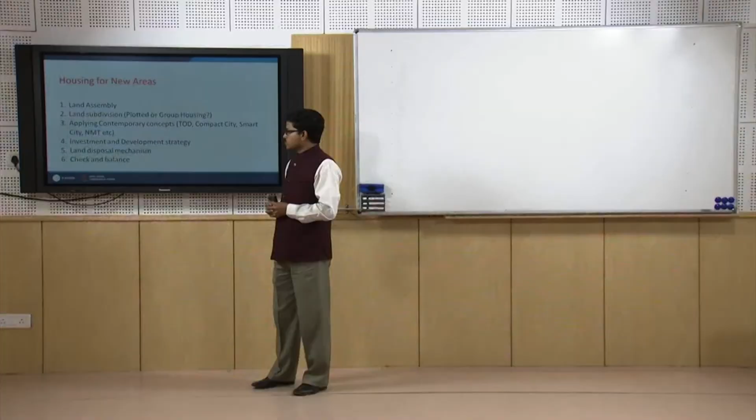Next, we discussed the investment and development strategy. This could be public, by a government organization, a joint venture using both public and private investment, or it could be entirely private.

Land disposal mechanism: if the land is acquired by the government, that is public land, developed for a township or public purpose, and should be distributed or allocated through a common lottery system. Otherwise, if acquired by a private party or investor, a separate mechanism can be thought out, with checks and balances by the public authority.

We discussed a few principles of land subdivision, like levels of planning. Planning is done at several levels: cluster level, neighborhood level, sector level, and also city level. Based on population, we started at the cluster level, which is nothing but a cluster of few families or buildings sharing common facilities like a small open space. Similarly, at the neighborhood, sector, or city and sub-city level, various kinds of facilities define its hierarchy.

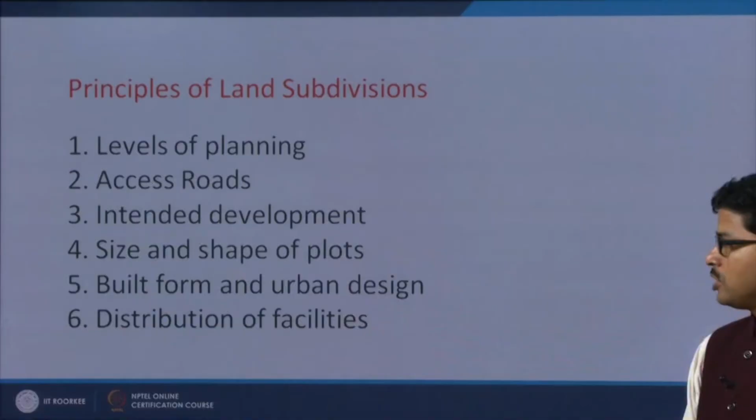Fourth, we discussed the size and shape of the plot. The size and shape should be such that wastage of land is absolutely minimum, because land is a very scarce commodity. The size and shape of the plot should be optimum and determined by calculating the population to be accommodated within the plot.

Then built form and urban design. Urban design involves more than one building, more than one block, more than one building complex across different plots. That's urban design as a whole - how we bring harmony, concept, and visual continuum in a series of plots or building blocks.

Apart from that, there are features like built form which can also be integrated into the overall development of the building. Then distribution of facilities.

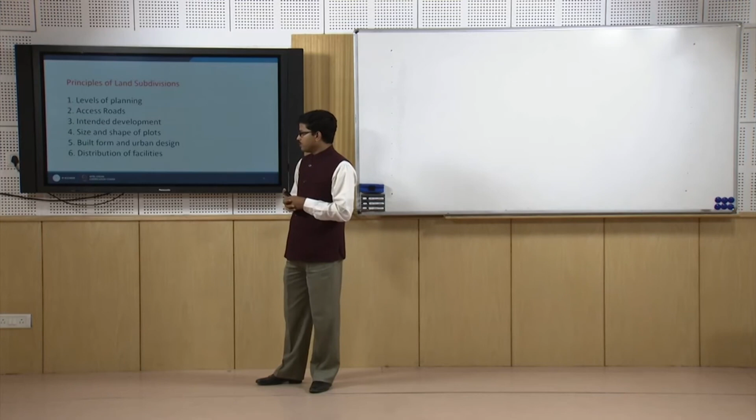Distribution of facilities is done at various levels - cluster level, neighborhood level, and sector level. So now, based on this discussion, we will move to plotted housing, which is one subset of the larger land subdivision around the city.

So around the city, for the new areas we are going to develop for the future population or future housing, some part could be plotted housing and some part could be group housing, by and large.

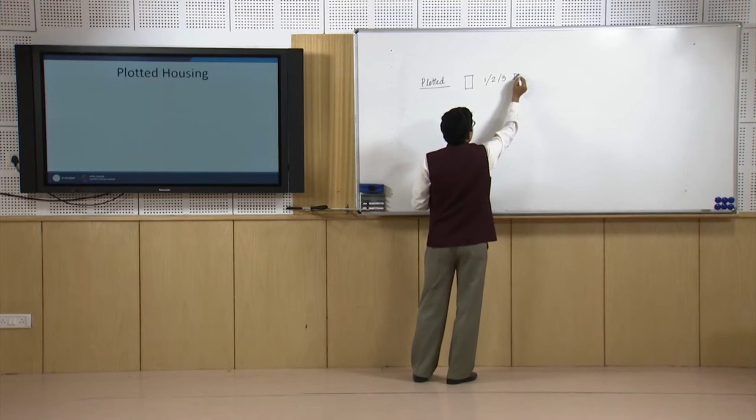Plotted housing, as discussed or defined earlier, is basically small plots which can accommodate a minimum of one or maximum 2 or 3 dwelling units in a particular plot.

But here the land ownership or plot ownership belongs to the first owner, who owns the plot, and maybe the second and third owners can have the house given to them on rent. So while we talk about total ownership in terms of buildability, the basic differentiation of plotted housing from group housing is that within a plot, the owner enjoys ownership of both the building and the plot.

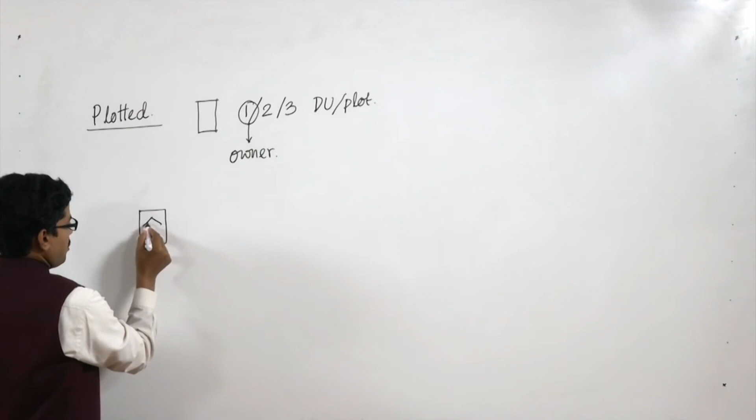So if this is plotted housing, ownership belongs to both the plot and the building. But in group housing, when it is group housing...

When we talk about group housing, it is not like that. The plot is bigger and there are more number of buildings, so that many people can stay together and enjoy some common facilities. Here the ownership of the plot is by community, not by individual, but ownership of the apartment or unit you are staying in is by the individual.

That is the fundamental difference between plotted housing and group housing. Based on that, we will discuss plotted housing and its implications.

In plotted housing, an individual owner enjoys sole ownership of the land and the plot. He can do whatever he wants to develop - the kind of building, landscaping, coloring, etc. But definitely some development controls are there that he has to abide by.

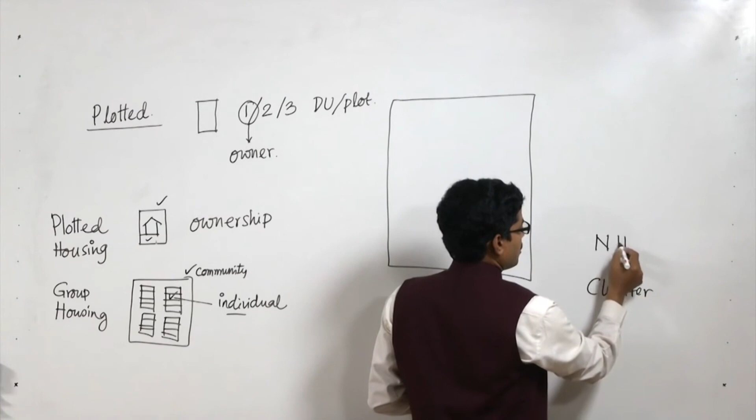Now, if this is a neighborhood - I hope you have already understood the concept of neighborhood and cluster. In the last lecture we discussed the concept of cluster, neighborhood, sector, then city or sub-city level.

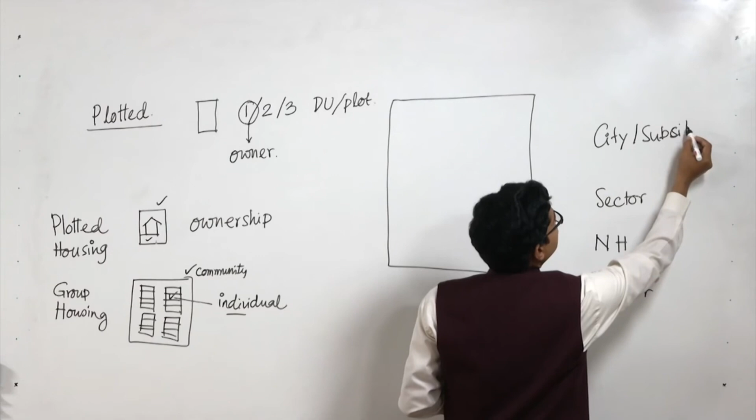Sub-city level. So we are talking about how at the neighborhood level we can further subdivide the plots into smaller pieces for individual owners. That is plotted housing.

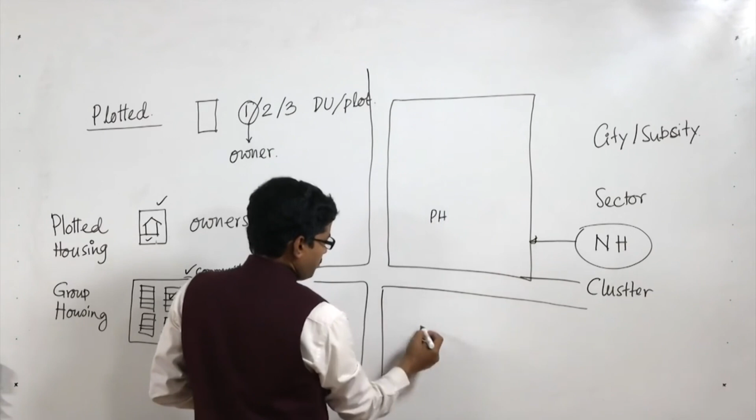So probably you have earmarked various sectors or neighborhoods in the overall land subdivision, and designated this plot as plotted housing, this plot as group housing, or this plot as cooperative housing, whatever it may be. So how do we proceed for plotted housing?

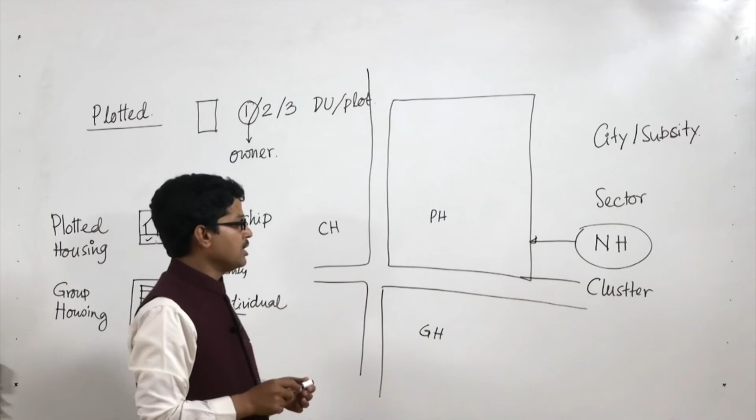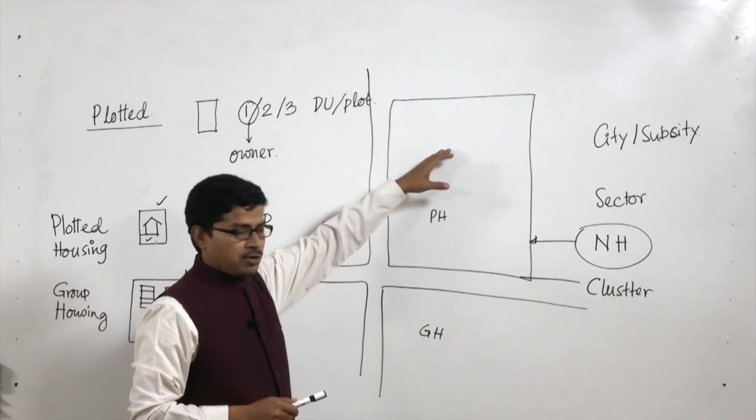Based on the overall housing strategy or city plan strategy, some population is assumed. Based on the population we can determine the number of plots and the size of plot. So considering, for example, in a neighborhood we have to accommodate say 6,000 people.

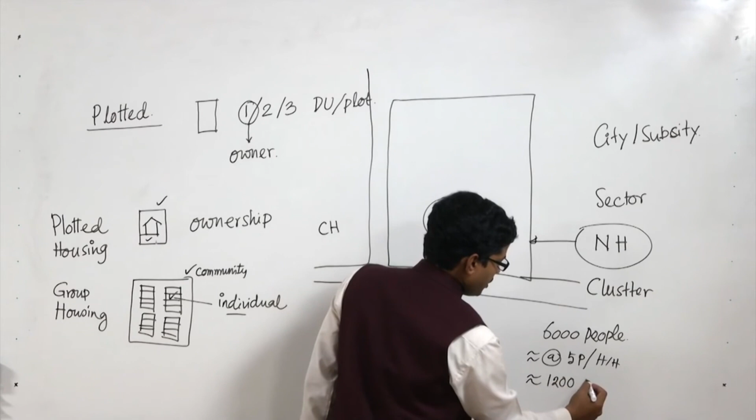6,000 people means, if we consider at the rate of 5 per household, then that will equate to 1200 dwelling units. That means 1200 families will be living there. So for discussion or convenience, if you consider that one plot...

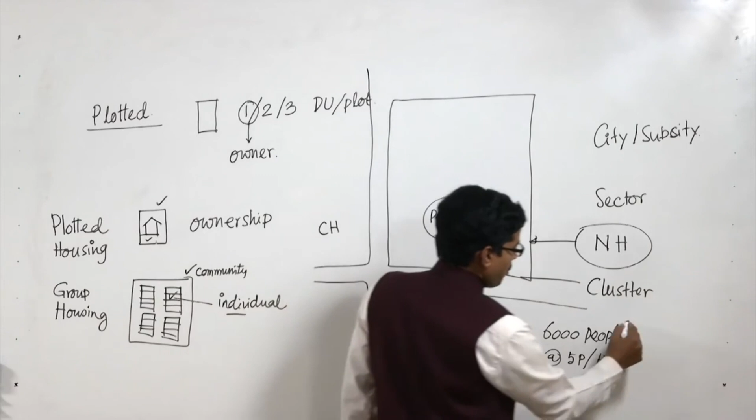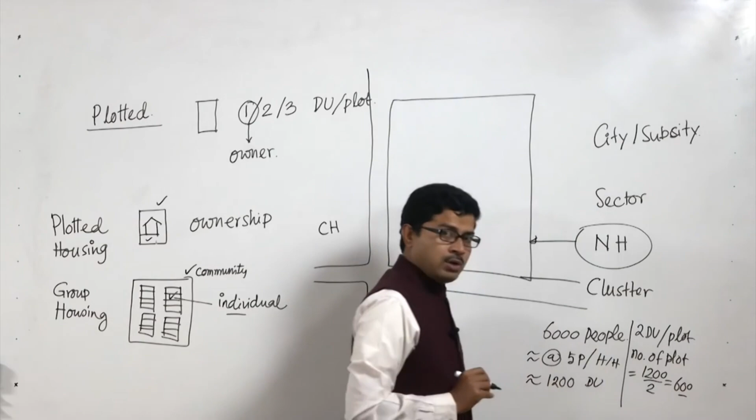...that two dwelling units or two families will be sharing one plot, then the number of plots will be 600. Now this 600 number of plots can be higher income group, middle income group, or lower income group.

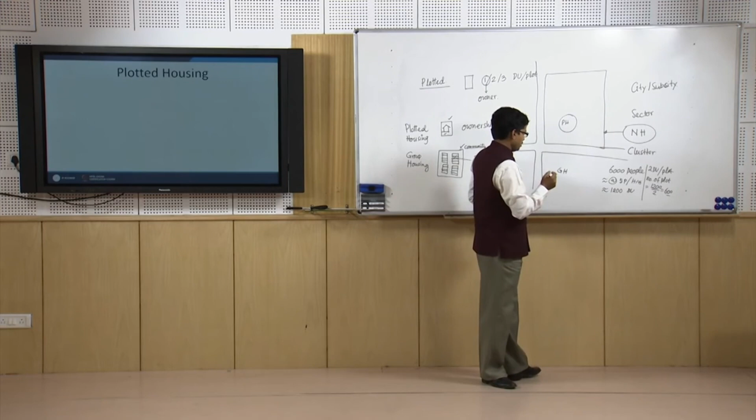So based on your overall strategy or the mandate given by the housing strategy exercise, you can determine the ratio. Let us take an example where out of 600, your ratio for different categories of housing is, say, HIG is to MIG is to LIG as 2 is to 3 is to 5.

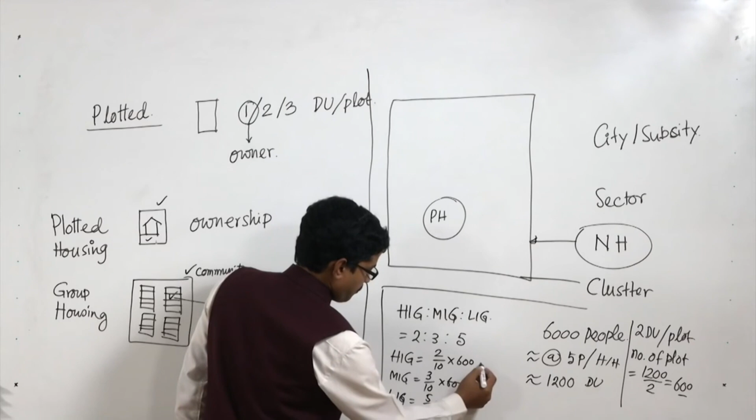So in that case, if the total number is 600, then your HIG will be calculated accordingly. This is the final number of plots you have to accommodate for each particular economic group.

Now definitely, based on their affordability, the size of the plot for higher income group, middle income group and lower income group will not be similar or the same. So how do you determine the size of the plot?

Let us take another example. For our convenience we are calculating it in a simplified manner, but the actual calculation could be a little more intricate. Let us understand at least some basic theory and assumptions, so that whenever we work we can apply that with a simple mathematical calculation.

Now let us take an HIG plot. Based on the city size or city profile, we can take an average size of the HIG dwelling unit. For example, let us assume the size of the HIG unit is 150 square meters.

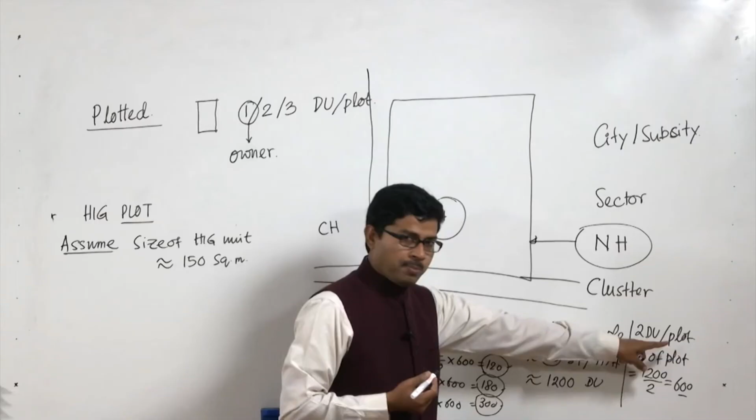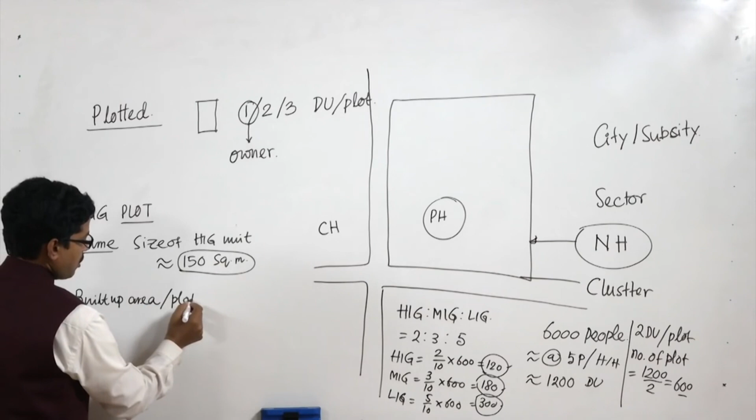We are assuming it can be 200, it can be 120, it can be any amount. So 150 square meter. So if we want to accommodate 2 units per plot, this is the built up area. So built up area per plot, considering two dwelling units per plot, will be 300 square meter. So this becomes the total built up area in a plot for a higher income group plotted housing plot.

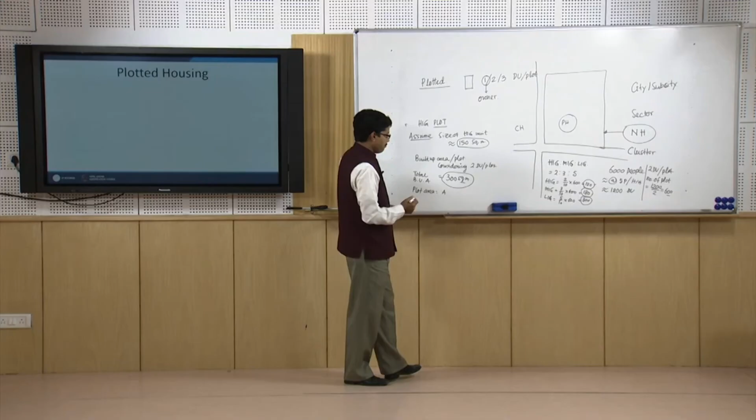Now let us go to that discussion of the floor space index. 2-3 lectures back we discussed that the density is very much related to the concept of floor area ratio or floor space index. So floor space index is nothing but the total built up area divided by the plot area. Now if this is the total built up area, and let us assume the plot area as A. So based on our FAR formula, we know that FAR is equal to total built up area divided by plot area.

So therefore now you can check the building regulations and the development control whether the FAR provided to that area is 2 or 1.5 or 1.75 or 2.5. So let us assume that FAR is 2 and total built up area we know is 300. So plot area is A, right? So therefore A is equal to 150 square meter, right? So this becomes the size of the plot. So similarly we can calculate the size of each plot, HIG, MIG and LIG.

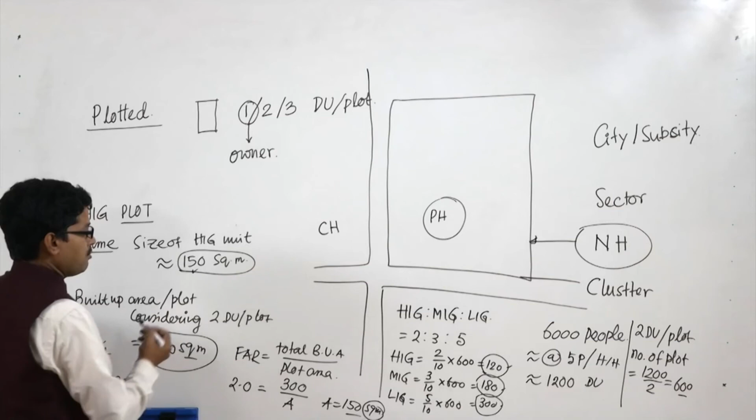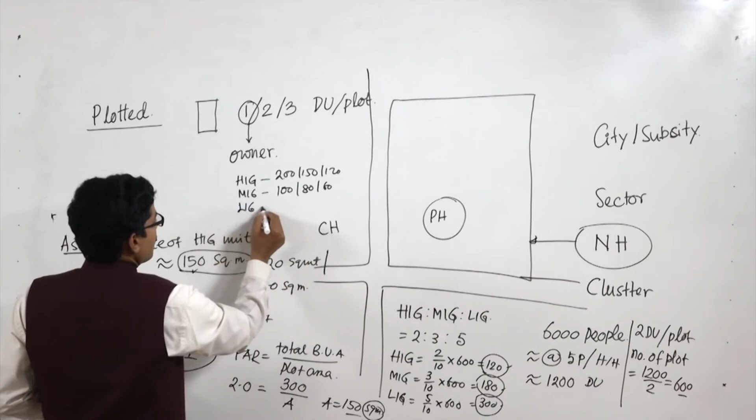Now if you want to make a variation of the plot sizes, it is possible that within the same economic group you can try to bring a little more variation. For example, HIG1, HIG2, HIG3, MIG1, MIG2, MIG3, starting from the basic unit to a little higher unit to a little bigger unit. So considering that you have taken 150 square meter per unit, you can consider 120 square meter. You also can consider 200 square meter. So based on that, HIG could be 200, 150, 120. We can assume MIG as 100, 80 or 60 square meter, right? Similarly, LIG could be 50, 40, 30. So this type of variation you can bring in a project, and then you can play with the size of the plot area.

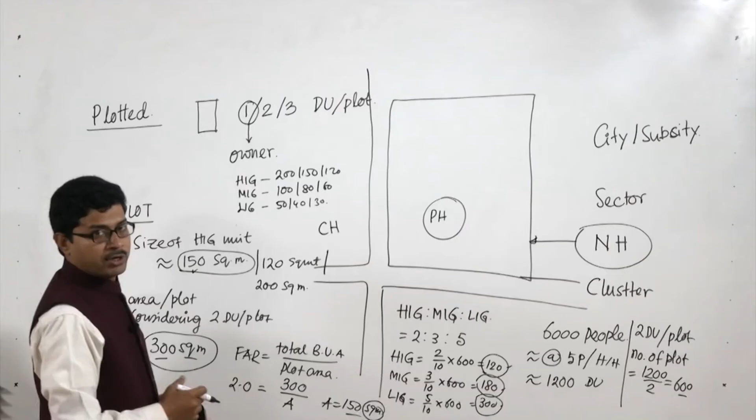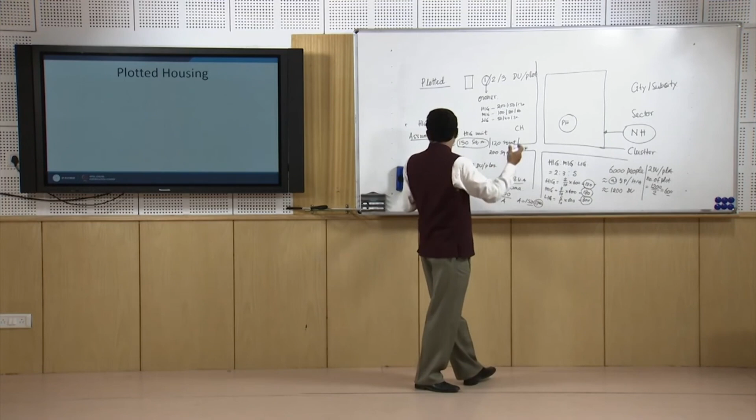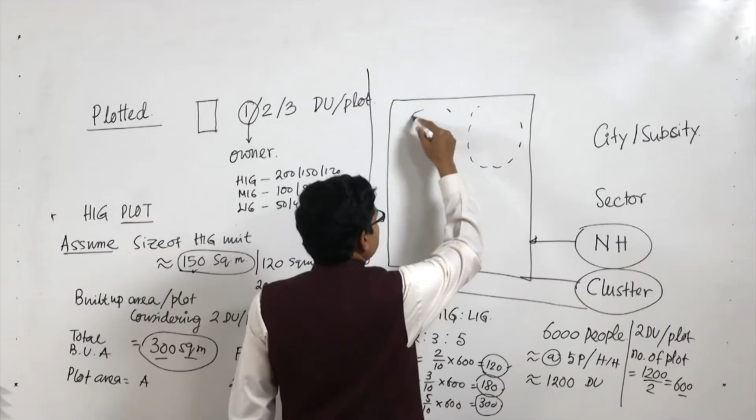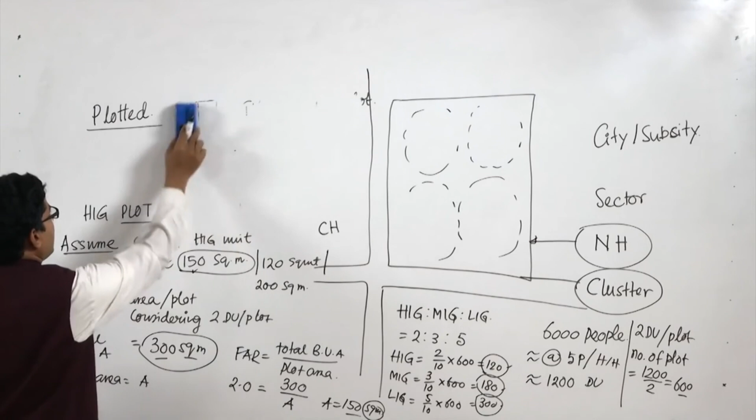Now once you come to the plot size and the number of plots, it is up to you how you are going to accommodate all those plots in a given chunk of land. So here you have to go back again to the concept of cluster which we discussed. Traditionally in a neighborhood there could be 4, 5 or 6 clusters, based on the facilities. Now at this junction, let us take a look at the ingredients which make a neighborhood, in terms of the facilities and the land. So here basically you are dealing with 4 types of components to make up plotted development in a particular piece of land.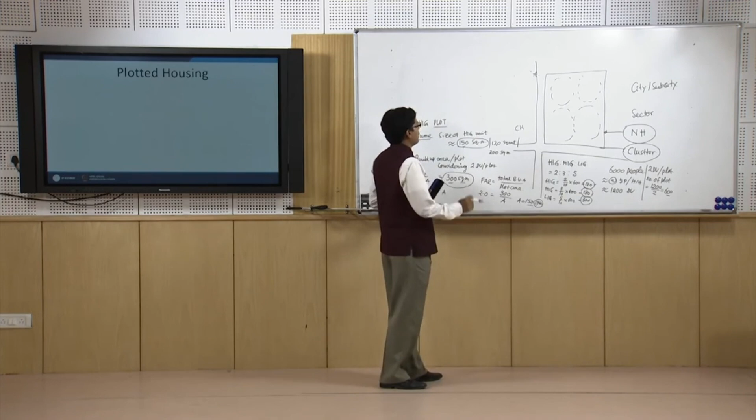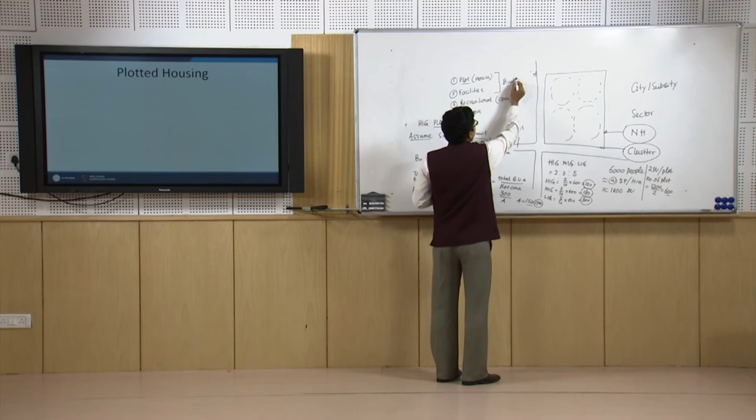Number one is the plot itself, plots for houses. Number 2 is the facilities, right. Facilities means commercial, school, health, educational, all these facilities. 3 is recreational, or open space, and 4th is your network. Now these are the broad 4 components of your plotted housing. Out of these 4 components, these 2 components are basically built components, and these 2 are basically unbuilt components. Right.

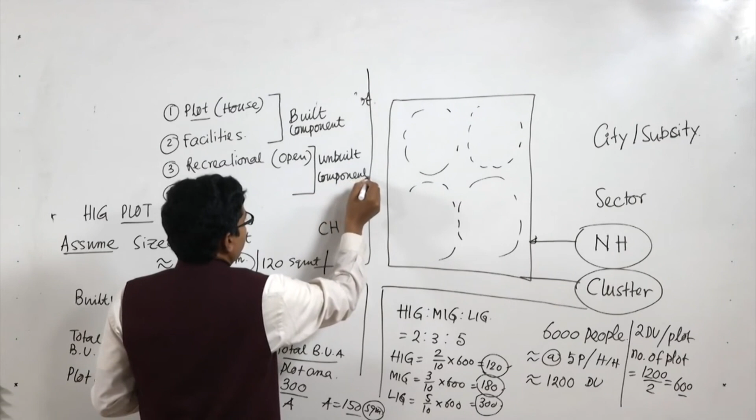So the purpose of giving the facilities as a built component is to enable the houses to get the essential services, like day to day services like vegetables or grocery, or any facilities which we want from our neighborhood on an everyday basis. The purpose of recreational space is to give the people living there psychological or mental relief. When you go to some park, or when children play in the playground, they get mental satisfaction. So this is one of the important needs for recreation. You meet with your people, your friends or relations. So recreational space is fulfilling your need for relations, your social need, and this is fulfilling some of your basic needs.

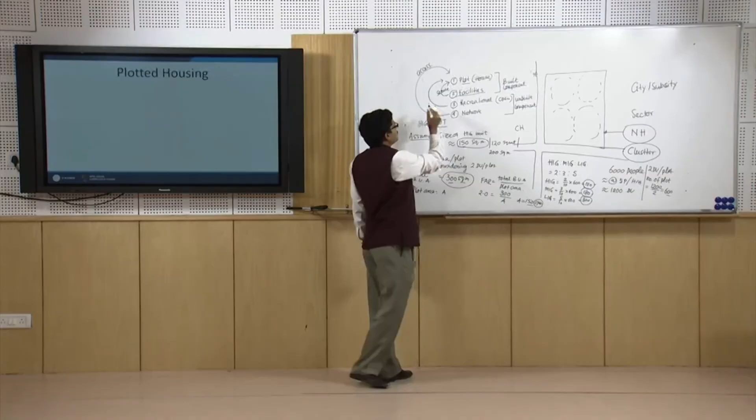And also the network, which is another unbuilt element, is giving you the access. So the facility is giving you the essential service, the recreational spaces are fulfilling your social or recreational need, and network is fulfilling your access or connectivity need. Now it is very important to see how in a plotted development you keep a balance between the built component and unbuilt component. Unbuilt component is very important to make a relation between the built and unbuilt. Now there could be 2 approaches. One approach could be,

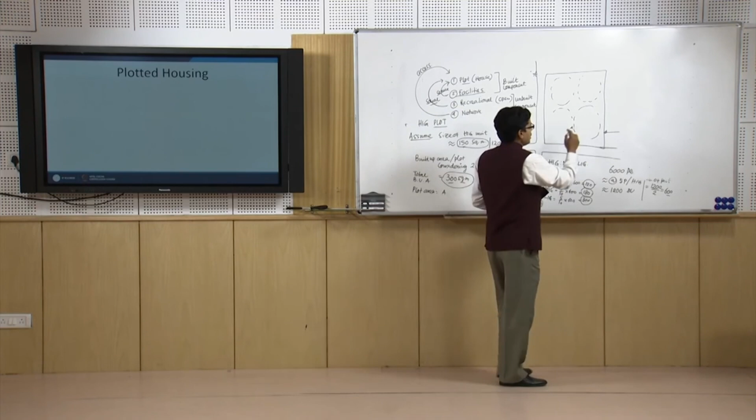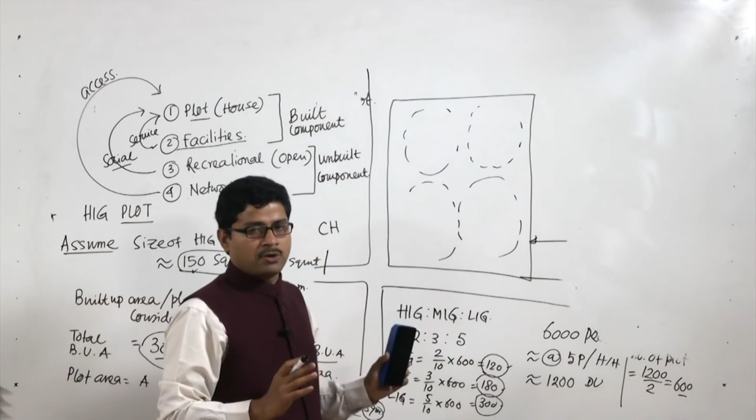now at this point we have to go back to the discussion of the hierarchy of planning which we discussed last lecture. We discussed that the hierarchy will be in terms of the cluster, the neighborhood, and then higher levels of planning like sector, but here we are dealing with a simple one neighborhood for convenience of discussion. In one neighborhood, how can we come out with a very specific distribution of the land area for plotted areas and network areas? So for that we can distribute the open space or open recreational area and facilities.

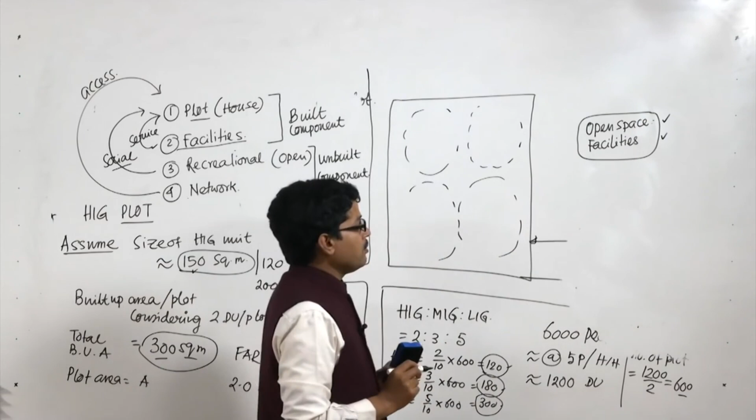So these two are a very important part. One is your unbuilt component, another is the built component. Based on how you are distributing open space and facilities over the whole area, you can take two approaches. One approach is you can go for distribution with a hierarchy approach.

Hierarchy approach. So the hierarchy approach enables you that if this is the total component, you can distribute over four components, and each of the four components can have further four micro components. So this is the hierarchy approach. Another approach could be that you can distribute the open space and facilities as a continuity.

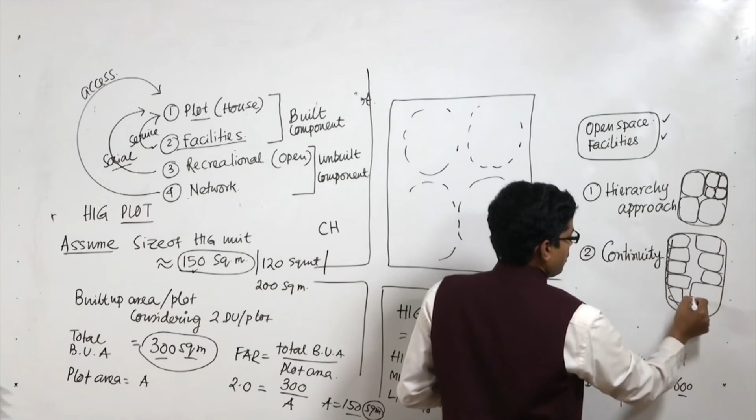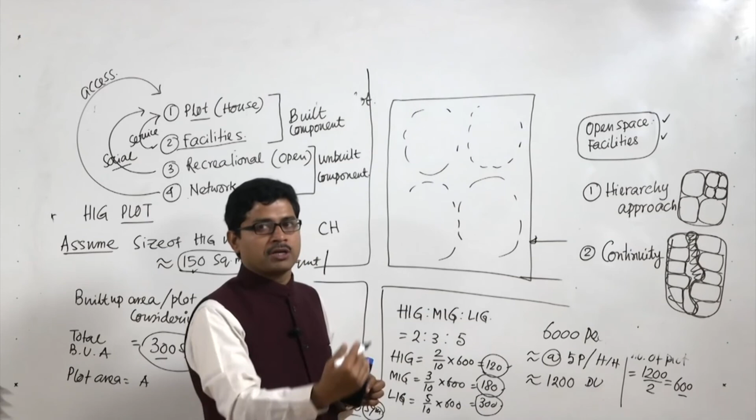If this is your neighborhood, your clusters can be placed in different locations and in different fashion, and some part could be a continuous area to provide the facilities and open space as a continuous set of access, continuous facilities or continuous accessibility. So from every location they can access.

Now, these two have different advantages and disadvantages. If you provide the facilities and open space in the hierarchical approach, that means you are placing open space for every sector, every component separately. You are providing facilities for every cluster separately, but here you are not providing the open space separately, but you are providing it as a continuous stretch of land, right.

So here in the hierarchical approach, the advantage is that it is distributed almost evenly, but here the distribution could be even or it can be centralized. So basically here the distribution is centralized, because the facilities and open space we are giving at the center, we are not giving on the other side, assuming that everybody will be able to reach that facility with easy connectivity.

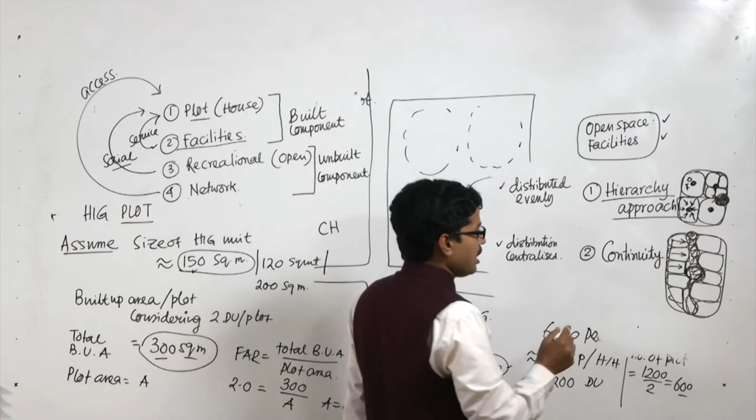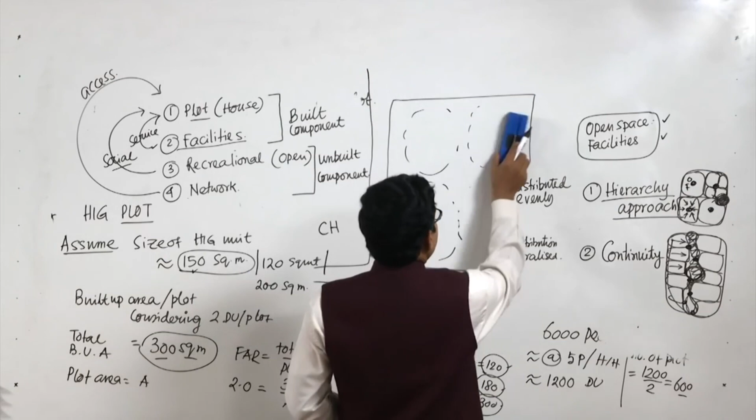On the other hand, if this kind of continuous approach is taken, we can place various kinds of facilities in different locations. So everybody gets all the facilities, but with a different type of accessibility. So these two approaches can give us two different scenarios or two different methodologies to make a plotted housing.

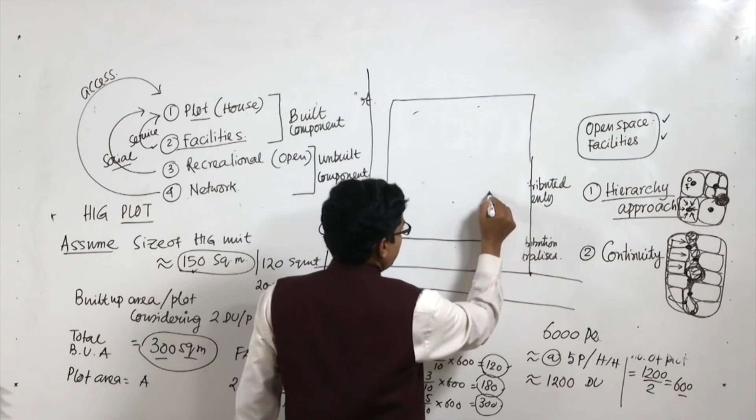Now, let us discuss some of the elements related to the network. We discussed the open space and the facilities, which could be distributed as per the hierarchy, or could be continuous. Now, the objective of the network is to connect the open space and facilities. Some basic principles are there which we should maintain for laying the network or the connectivity.

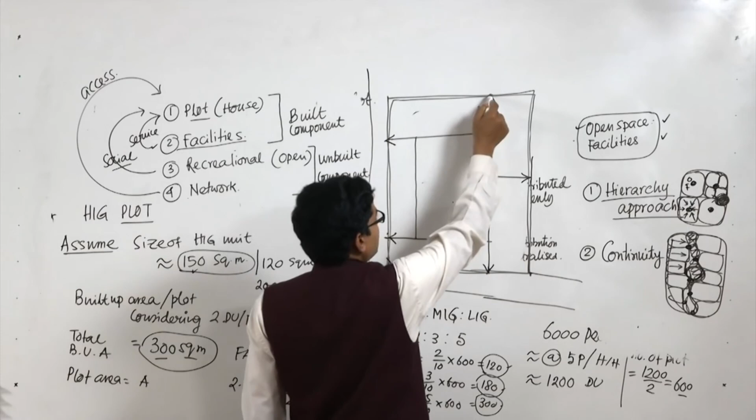If this is the peripheral road, which is usually a higher level of road, maybe a collector road, subarterial road, or arterial road, usually at the higher level of road we do not make too many punctures giving the local road. So this is one entry, this is another entry, this could be another entry. Around the periphery, at most we can give two punctures on one side. So the interface between the local road and the higher road should be minimum at the periphery.

So in the periphery, the puncture or interface between the local road and the higher road will be minimum. Second is that inside the neighborhood you can make any number of junctions with the local road, and that is inevitable. For example, there could be junctions like this, there could be roads like that.

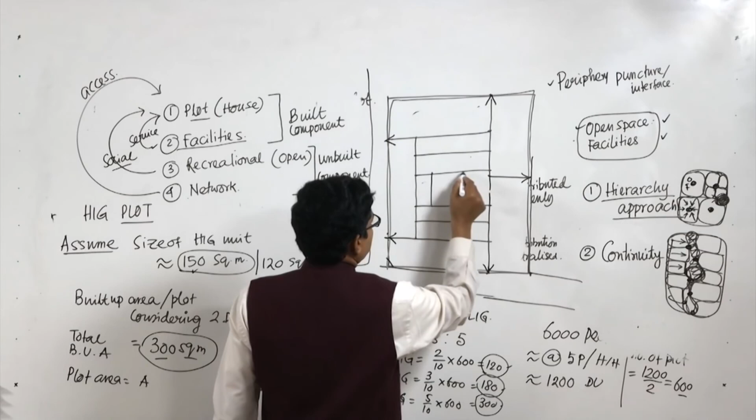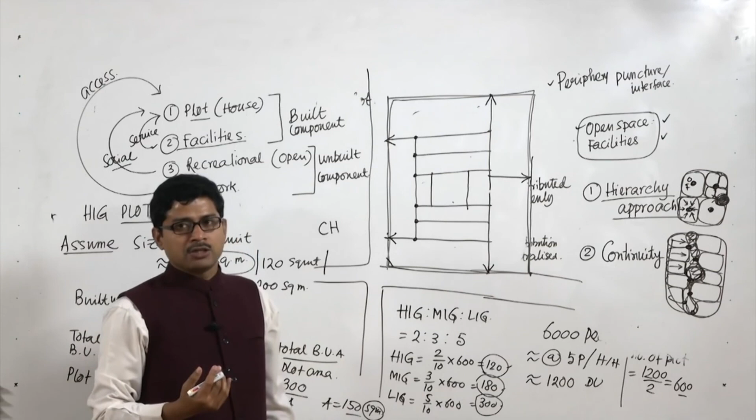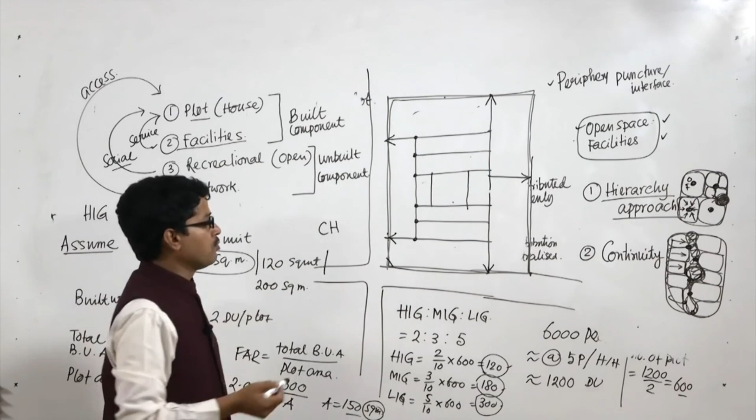Here, even if these junctions are in very close vicinity, like 40 or 50 meters, it is not as dangerous as having too many punctures in the peripheral area, because in the peripheral area there is high speed or a higher volume of traffic. So we do not disturb the high-traffic road with many punctures, maybe one or two. So that is principle number two, the number of junctions inside and outside. Then another very important part is the segregation of vehicular and non-vehicular circulation.

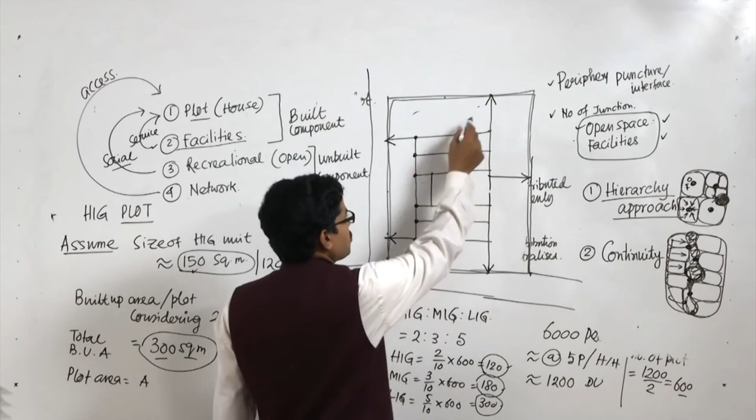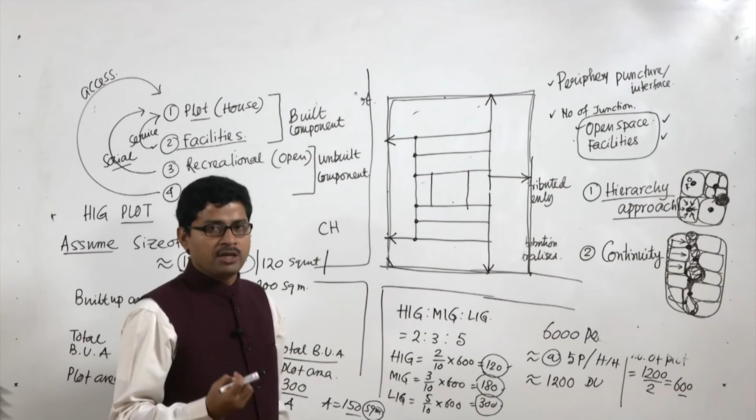Here you can see that it is basically based on the vehicular road network, which may be 10, 11 or 12 meters, but what about the non-vehicular, those who are walking? So the non-vehicular network and walkability is also a very important parameter here. So if you find that this distance is very long, say more than 200 meters.

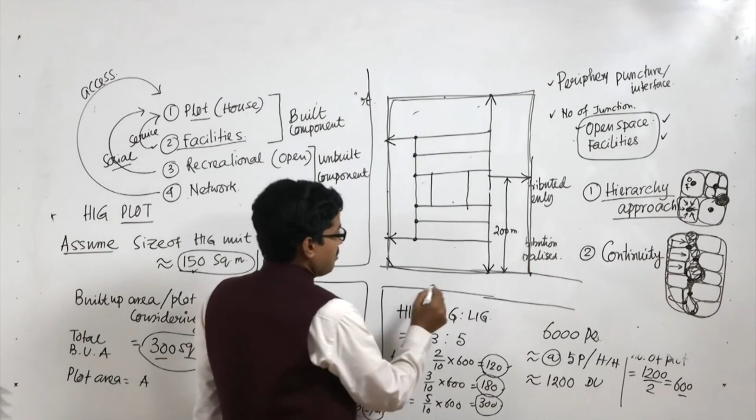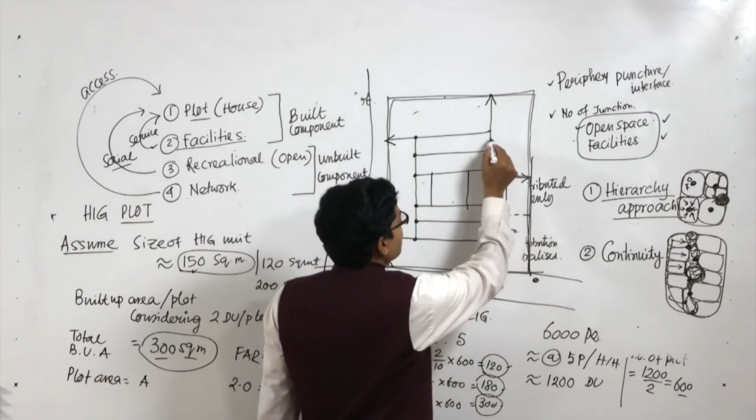So, think about an example that there is a bus stand here, somewhere here, and my house is here. So, how do I come here? I have to go there and come like this. So, why not we can have a pedestrian connection here, or maybe here, or maybe here, or maybe here.

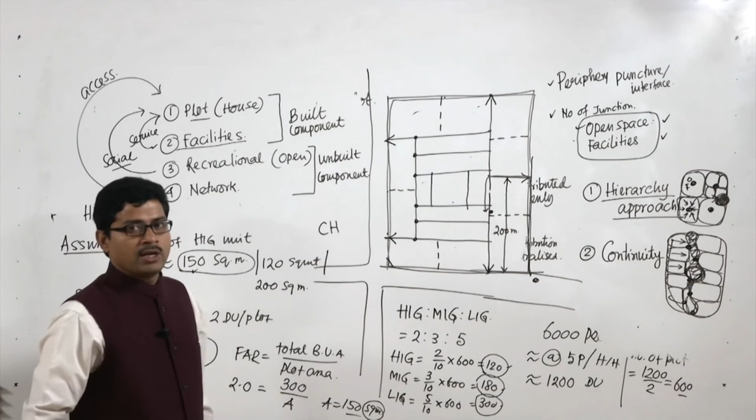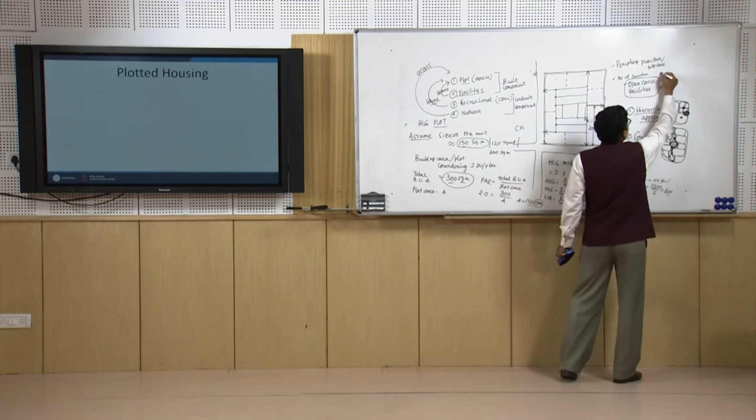So, in several locations, irrespective of your vehicular connection, we can have many pedestrian connections to provide the pedestrians or the common people access to their plots from the public transport terminals or public transport stoppages. So, that is another principle, that is the vehicular and non-vehicular interface.

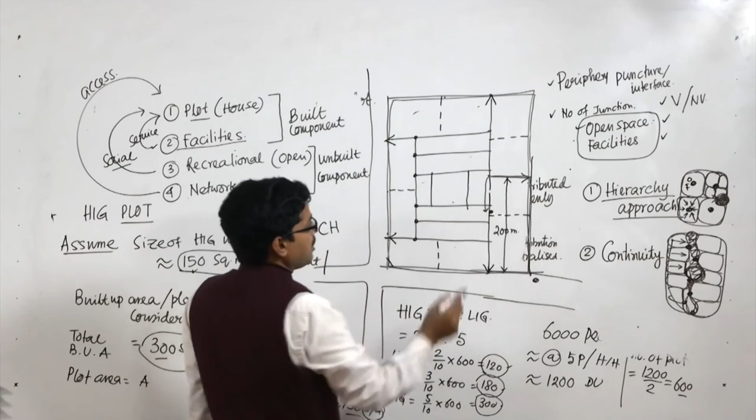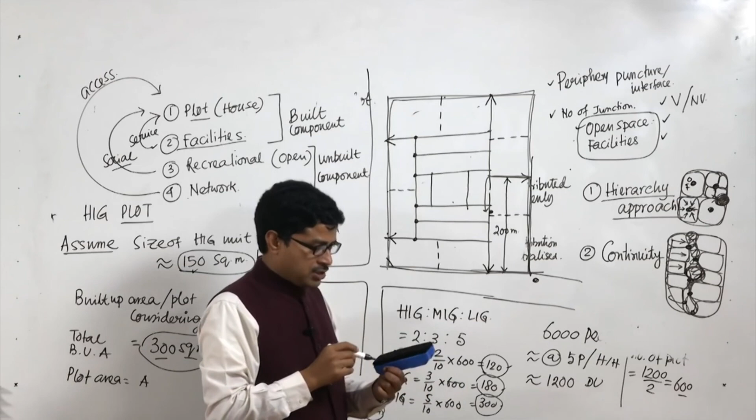Apart from this vehicular and non-vehicular interface, inside the neighborhood, based on your principle of hierarchy approach or the continuous approach, you can make the road network in a different fashion. Now, after this discussion, let us quickly see some pictures of plotted housing, so that you can understand the principle in a better way.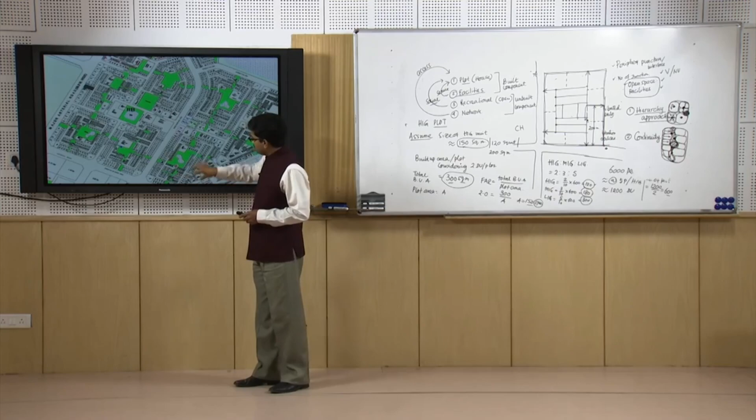So, here you can see that this plotted housing is done on the basis of the hierarchical approach. This is one neighborhood. Every neighborhood is constituting one separate cluster. The facilities are distributed, although the open space or the recreational open space is continuous.

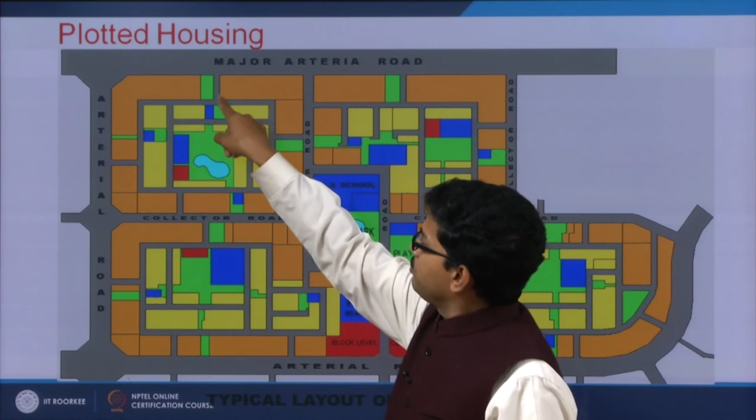In this example I showed before also, you can see that all the facilities are distributed over the neighborhood, and the puncture of the local road from the major roads is only one, not multiple, to reduce the accidents and to reduce the congestion. But inside the neighborhood you can have multiple junctions, multiple punctures as well.

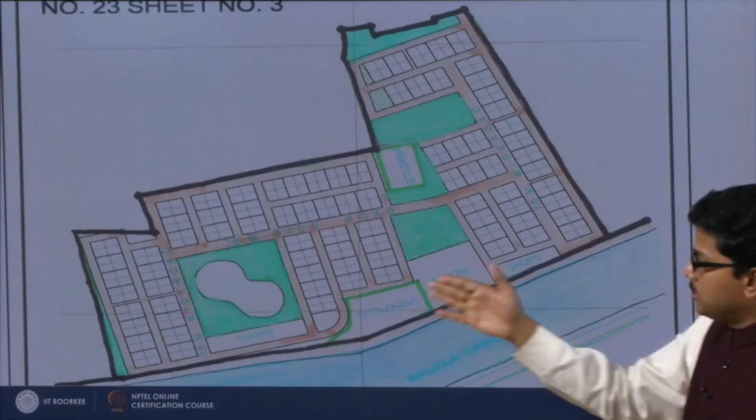This is a plotted layout for the very poor people of low income group housing. Here you can see that even if the vehicular puncture is not there, at various points the pedestrian punctures are there, so that people can walk and reach their destination. So, these kinds of elements are there in a plotted housing.

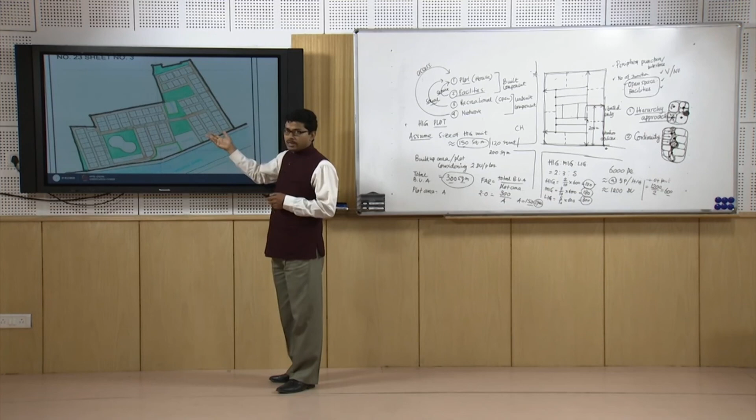Here also you can see the pedestrian puncture, and this is the major road. Inside, on the local road, you can also see various different kinds of punctures. So, that is possible within the neighborhood, but outside the neighborhood we cannot have more punctures, maybe 1, 2, maybe 3. So, that is the major concept.

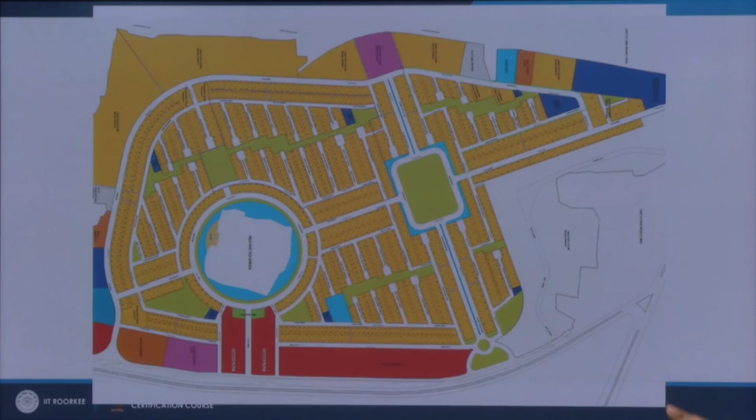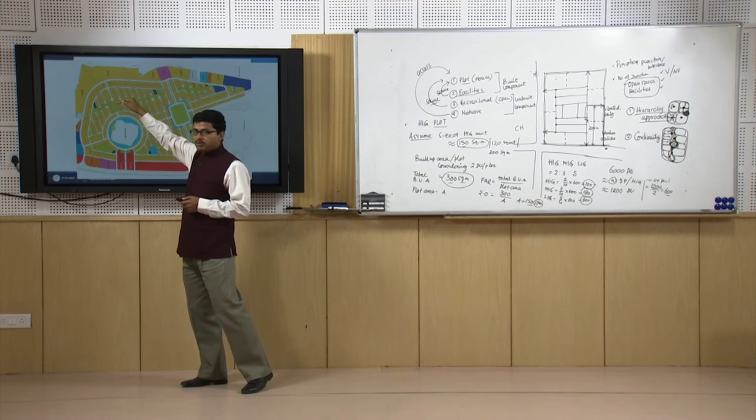Now, in this layout you can see the second approach, where the open space and facilities are provided as centralized green areas in a continuous fashion. In this continuous fashion, one element is clear, that you will not find a very defined hierarchy of the open space. The boundary of the open space is very much irregular, whereas in the earlier example the boundaries of the open space were very much regular.

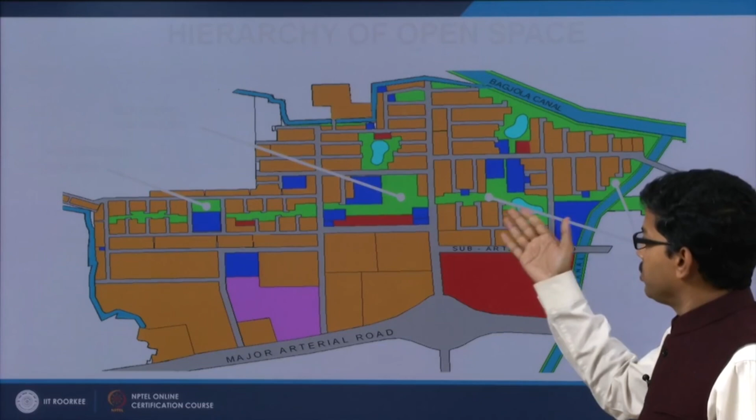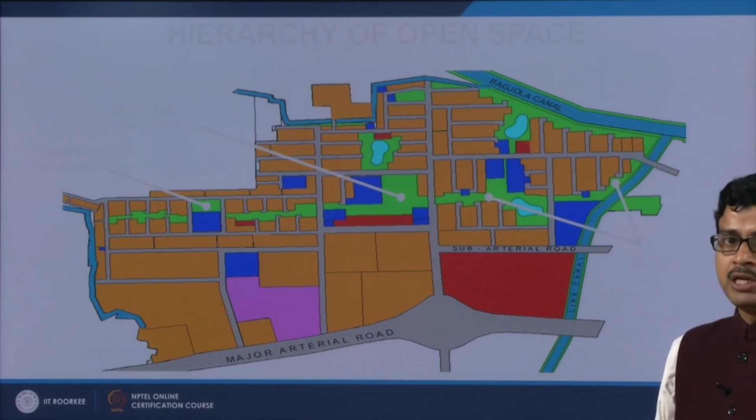Here only the central open space is very much regular, which is a rectangle, but other open spaces are not that regular. In this example also you can see the irregular profile of the open space. This kind of open space gives you some feeling of continuity and largeness, whereas the maintenance of the open space becomes sometimes tedious or challenging, whereas the regular open space is always better to maintain because it is surrounded by the plots.

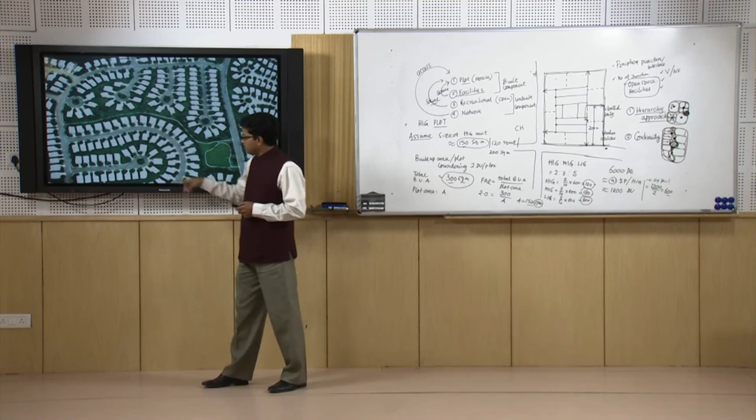This is another approach you can see, but this kind of approach takes a lot of land area. So, density will be very less if we go to this type of approach, where centralized green areas and open spaces are provided, and the local roads are provided as what we call a cul-de-sac, which ends as a dead end, but it is designed in such a way that a car can take a round and come back to the road.

So, these are basically some of the pictures of projects I have shown. Various projects are there. You can browse through the internet or the books and the reports. You can see many examples are there. You can see and always refer back.

So, today we discussed basically the principles of plotted housing. Two fundamental approaches we discussed. One is the hierarchical approach, where the planning is done in a hierarchical fashion. Another is the continuous approach, where the facilities are provided in a continuous recreational open space. The open space and the network make the unbuilt component, whereas the buildings and the facilities make the built component of a plotted housing.

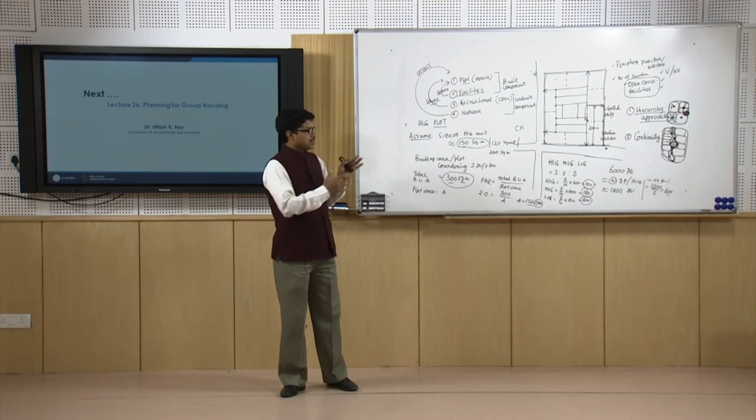And also we discussed how to calculate the number of dwelling units and the size of the dwelling unit or the plot based on some assumptions and some overall guidelines given by the housing strategy. So, next day we will discuss the principles of group housing.